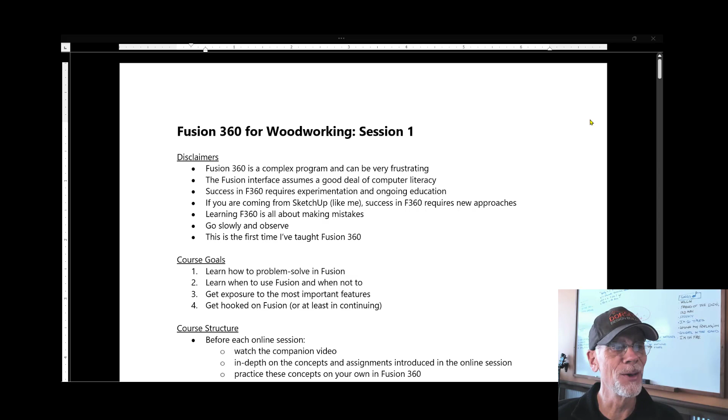So anyway, my goals in the class are for you to learn how to problem solve in Fusion, for you to know after this class when to use Fusion versus some other programs that you may have used for design such as SketchUp. I want to expose you to all of the most important features in Fusion and hopefully get you hooked on it like me.

So the structure of the course: before each session, I'd like you to watch the video. For instance, this is the video for session one. After our online session, I'd like you to watch the video. Hopefully you'll learn new concepts there and practice those on your own. Each of these videos will have assignments at the end for you to do. Please get those assignments done before the next session, and it'd be great if you could take some notes and discuss with the rest of the class your successes and failures as you did your assignment.

At the beginning of next class, each student will be able to present their assignments and share that information with others. Then in subsequent classes, I will demonstrate the new topics, but please interrupt me if you have any questions at any time. Also, if you do miss a class, these videos will go into probably more depth than the class does, so you should be okay.

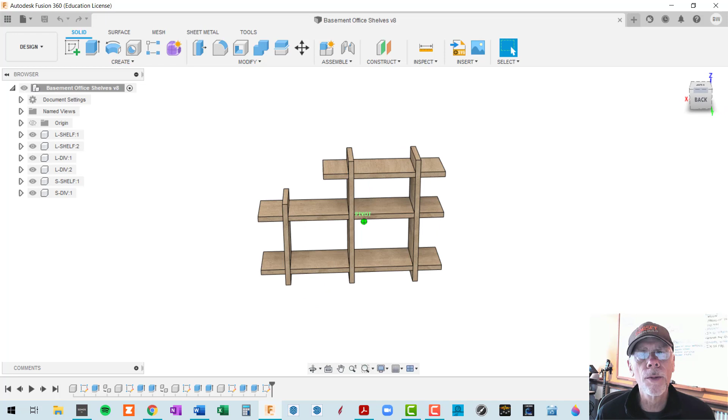There's also this view cube in the upper right corner, and with my left mouse button I can drag that and kind of orbit around, repositioning the view cube. But you can see it's a little difficult to do that, and there's really no reason to since it's easier to orbit using the mouse and the shift key.

But the thing I do use the view cube for is if I want a straight on view, an elevation - I can click on front. If I want a top elevation, I'll use this little button right here. You can spin this around to your heart's content, going from straight on view to straight on view. If you want to return to your perspective view, you can click on the home button in the upper left corner of the view cube.

One of the things I'd suggest doing is using a camera setting of perspective with ortho faces. What that means is if you're looking straight on, you'll get an orthographic view, but if you're looking at a perspective like we are now, you'll get some perspective. Let me turn perspective on and go to my front view - you can see I'm getting some perspective here, and I don't generally want that when I'm in one of these straight on views.

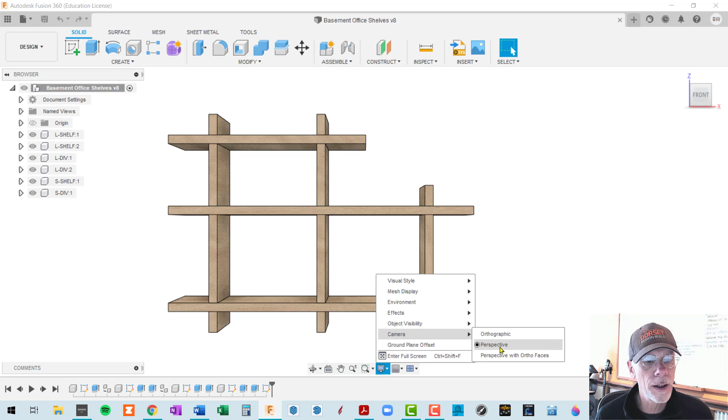So that's why I set this to a camera setting of perspective with ortho faces. Now I'm getting orthographic. If I orbit a little bit, now I'm getting a perspective view. That's a great feature - it doesn't exist in SketchUp, but I would highly recommend you do that.

So that is the data panel. We've done some navigation and looked at the workspaces briefly. Now let's look at the document tabs up here - basically I've got one document open. If I go to my data panel, go back to Woodworking, let me pick another - I'll go to Workbench, and I'm going to open up this Roubo bench.

Takes a second. By the way, all of these files are located in the cloud, so if you've got a complex design, sometimes it'll take a little bit to download. I'm going to close this.

This is a workbench that I built recently from a plan, and I took the plan and inputted stuff into Fusion just to get a better idea of how some of these parts work and interact. Now you can see I've got two documents open. I can click over here to go to this one, click over here to go to that one. And if I want to create a new document, I can either click on this plus here, or I can go to my file menu and do a new design there. So lots of different ways to do the same thing in this program, but I'll try to use what I think is the most common and easiest method.

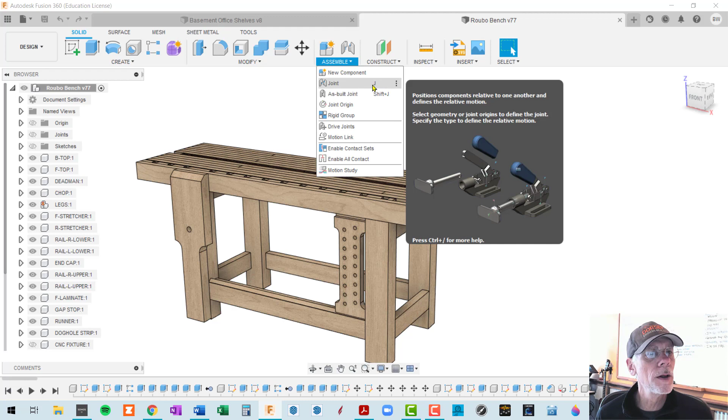So create is basically when you are creating either 3D geometry, or when you're in a sketch, different parts of the sketch. Modify is when you're combining things or cutting joinery or working on existing bodies. Assemble, we will get into this a little bit, but you can actually put things together and have hinges that move, and you'll find all of that in assemble. Construct are basically construction planes that allow you, when you do your sketching, which we'll get into shortly, to sketch on a plane. The origin is accessible on your model, so you can always sketch on that. But sometimes there's an odd angle you want to sketch on. First you'd create some type of plane to do that, and then sketch on top of that plane. So that's what this construction menu is all about.

Inspect allows you to measure primarily, but there's some other things. For instance, you can show different components in different colors. That's something I use often. Insert allows you to insert an existing drawing and kind of trace over it, amongst other things. We'll get into depth on all of the important features there, but just wanted to show you that basically you've got these icons on your screen. You've also got pull-down menus that are complete for all of the creation features, and you have shortcut keys. So again, many ways to do the same thing.

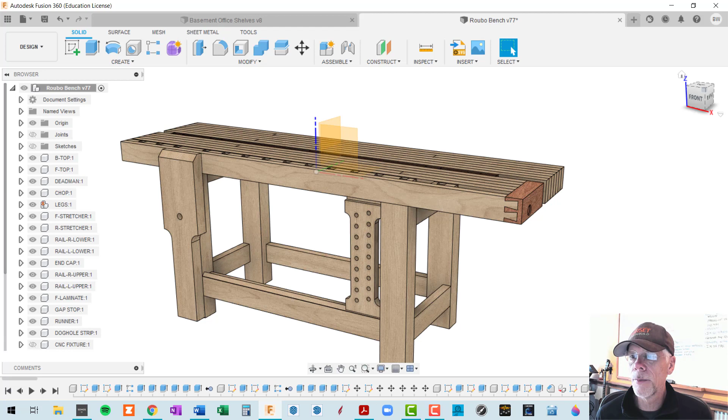Okay, so I'm going to get into a couple other preferences here that will be handy for us. Let me go back to our office shelves. You will see in any file you have, the very first thing is document settings. You'll see that in this workbench as well. So if we open up document settings in this, what's called a browser, it's basically just a tree. If I open that up, you'll see there's units, and if I double click on that... I think that's ending up off my screen. Oh, there it is. Okay. So you have to double click on this little guy right here to change your units.

Now a dialog box pops up that's docked to the right hand portion of the screen, and it's allowing me to select millimeters, meters, centimeters, foot, inches. I think when you start up Fusion, you will default to millimeters. So if you want to go ahead and change that to inch, I think we'll primarily be working in inches. The second thing that you should do is to go to your preferences.

So I clicked on my little BW circle here. When I go to preferences, and down to unit and value display, you'll see that in foot and inch display format, I've got fractional. So instead of inch and a half showing up as 1.5, it's going to show up as 1 1/2, which is primarily what you want for woodworking, at least I do. So anyway, beware of that.

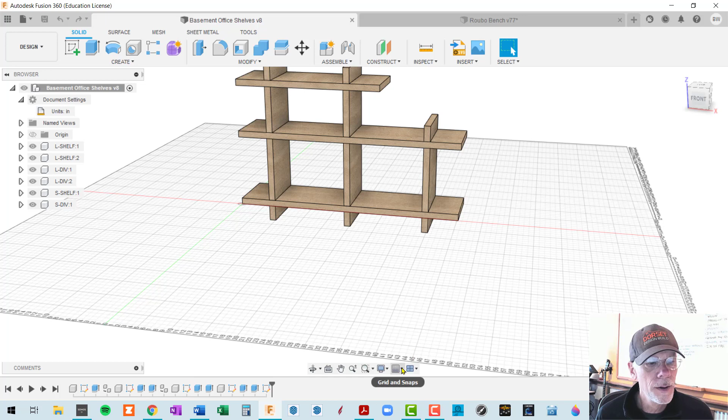Let's see, are there any other preferences? Okay, I do turn off my grid layout. If I turn that on, you'll see you have a grid. But the grid will also come on when you're doing sketching, which is, in my mind, the time that you want the grid. I don't really want it here. So if I turn grid layout off, you won't have it when you're just viewing your model.

So let me show you very quickly one other way to navigate. I have on my desktop a little device, I don't know if you can see it in the camera here, hopefully. It's called a 3Dconnexion, and it's just like a knob, but it's specifically made for CAD, so that I can hold this knob with my left hand and pull it in and out and turn it, and basically maneuver this knob any way I like, and it's super intuitive where I can quickly and easily navigate this model.

Certainly not something you have to have, but if you end up doing a lot of CAD modeling, the nice thing here is I can keep my right hand on the mouse and not have to use that for navigation. I can use that only for selecting menu items, and then use my left hand for very quick and smooth navigation. So it's out there if you want to take a look at it. But certainly not necessary.

All right, so moving on to feature dialogues. What I mean by that is I will do a quick extrusion here. So I'm going to click on a surface, and then go up to Create and select Extrude. Now I have a dialog box up on the screen that says Extrude, and it has lots of settings in it. That's what I mean by a feature dialog. So any feature that you do, whether it's an extrusion or a loft or a sweep or whatever, will have its own feature dialog box.

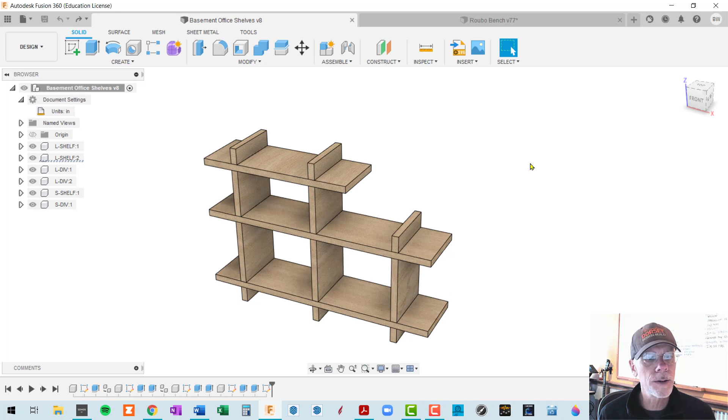Once these are up, you pretty much either have to cancel out of it or select all these settings and do an OK. For instance, I can pull this up, and you'll see the distance here is being set, and I've got an operation that's join or cut or intersect. I'll get into that in depth, but if I click OK, then the feature dialog box is gone. Then I can do other things. So I'm going to hit Control Z to undo that.

Okay, now to go back there and do that again, this time I'm going to hit the E key, which is my extrude shortcut. I just want to show you that you can move this feature dialog box around, and it does have a tendency to get in the way of what you're doing, but you can always pan your model away from it. I like to leave it here on the right hand corner of the screen, and if you want it back here in this area, all you do is drag this. I see how I'm getting a green bar highlight, and then let go of it. That docks it on this right hand side of the screen.

I'm not sure if you can dock in other spots. Let me see if I can. Here I can dock it left, but just see it moved the browser over. So I'm going to go back over here. Okay, so these are what they call feature dialogues. I'm going to cancel out of that.

Now, one of the things that I think takes some getting used to, coming from SketchUp for instance, is that you do an extrude and you think you're done. And then you try to go off here and do something else. Well, in that case, that finished my extrusion.

I was about to say you won't be able to do it. Sometimes when a feature dialog box is up, you can't do something else. You have to finish that feature first, so just be aware of that.

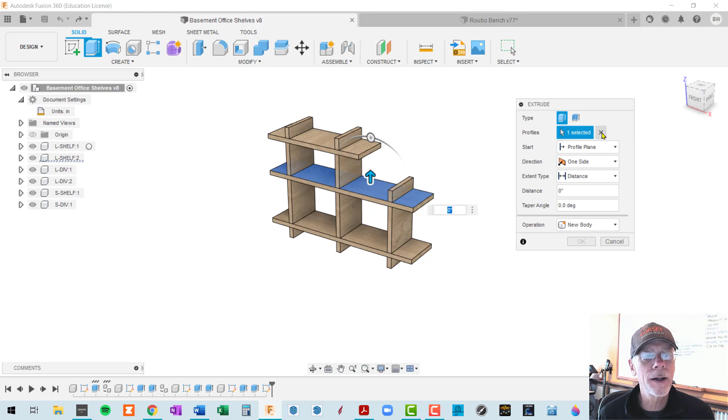Okay, that's feature dialogs. One other thing in feature dialogs is, I'll do an extrude. This blue setting, beware of that, because that is basically telling you what you should do, though you can set any of these in any order you want. So for instance, I can kill my selection, and it's saying, well, you better select something to extrude. So I can go down and select that.

And then once I'm done with that, I can handle the other settings. So the blue area is generally just a suggestion by Fusion that this is either the next thing you should do or the most important thing you should do within this feature. So let me dock my feature. Let me cancel to get out of there.

Okay, so let's see what we haven't gone over here: navigation, preferences. I feel like I'm missing the browser. The browser is basically a tree structure, and you can open things up by clicking on this little triangle. You can see that sometimes there are multiple levels of features and other items to open up here. A lot of this gets set up automatically by Fusion, and some of it's stuff that you set up.

So this is your file at the very top. Then you have your document settings, which we changed to inches. I'm going to close that up. And then you have named views, which are exactly the same as this in the view cube. So if I click on front, it's going to scroll to the front. Named views allows you to basically set up your own view. So if for whatever reason I want to be in this particular view, I can go over here to named views.

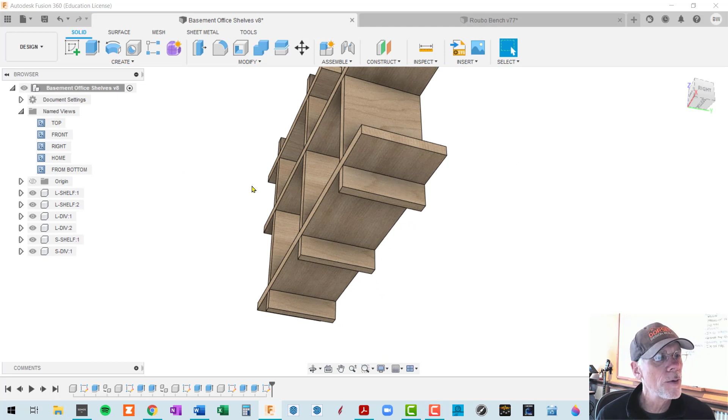I will show you renaming in another area that I think works a little bit more predictably. So I'm going to close up my named views. Then I have my origin. This is the origin for the entire model, and we'll get into strategies on where you want to start your sketches relative to this origin, which can really help you. But that can always be viewed or it can be hidden. So if I just click on the little eyeball, I'm hiding my origin.

Okay, so then I've got a series of what are called components. And if I click here in the browser, you'll see also over here in the model space, I get a blue highlight. So that's L shelf 1. This is, I think L for large, so this is large shelf 1, this is large shelf 2. And you'll see a little bit of difference here: you'll see shelf colon 1, shelf colon 2. That means these are identical components, and this is the second instance, and this is the first instance. But we'll get into that also.

Now here's my divider, my large divider, my second instance of the large divider. Again, these are all components. And now I've got the small shelf and my small divider. Okay, so these are all components. If I am to open up any of those, well first off, let me close it. I can hide any one of those.

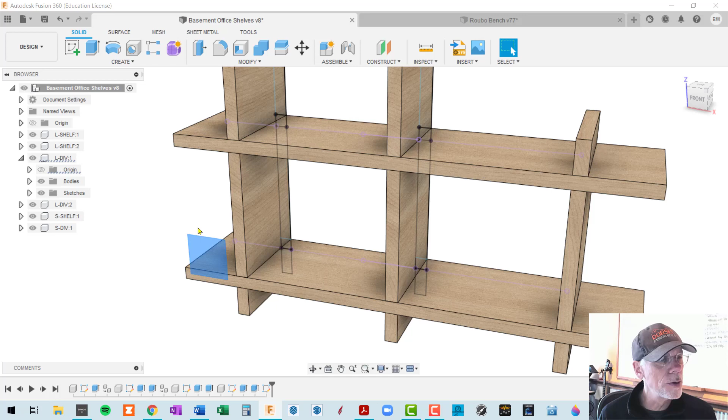So let's see, we want to find something in the browser. I want to find this origin. So I click on it, and now I see a little squiggle underline. That shows me it's in this large divider. So if I open up the large divider and go to my origin and hide it, boom, it's hidden. Now you still see a blue selection. If I click outside that blue selection, that's gone. That's just telling you it's still selected, but it's hidden. So you just click away from it and it'll be gone.

Now the same thing here. I've got a sketch and I don't want that showing. It's really not part of my 3D model. So if I click on this and then right click and find in browser, where is that? So it's also in my large divider component, and now sketches opens up and it shows this sketch. So I'm just going to hide all the sketches in that component, and now I'm good.

Okay, so if I go down here and say, okay, I only want the large shelf, which is this one right here. I only want that. I only want to work on that. I'm sorry, the large shelf is this horizontal piece. You see how that is highlighted, but everything else is dimmed. So that means, okay, you have this component open, and if you create sketches or create additional bodies, they're going to go inside that component, which is essential for keeping your design basically in order.

So you really, in the browser, should always be conscious: am I in the entire model, which I am here, or am I in a particular component? And when you're in a particular component, you will see that. Now, if the rest of that stuff, if you don't want to see the rest of the components within this model...

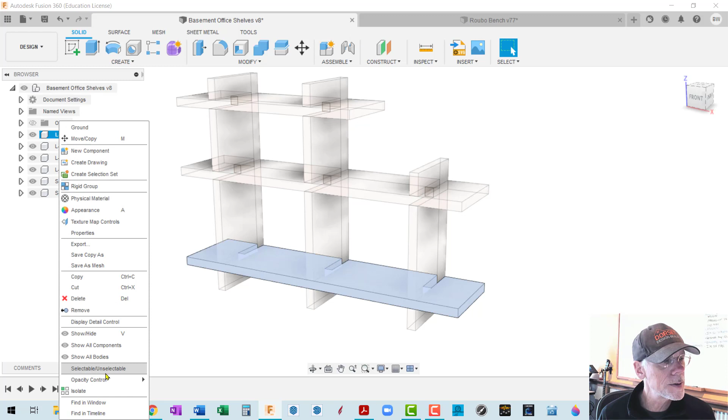Another thing you can do is I can right click on this and go to isolate. And now the shelf, the large shelf, is the only thing that shows up on the screen because I've isolated it.

If I want to unisolate it, I can right click and go to unisolate. Another way of doing that, if I undo one level here, is to go up to the office shelves, the entire file basically, and I can right click and say unisolate all. And now I've still got this shelf as the active component, but all the rest of the components are also shown. If I want to see everything, the way we saw it initially when we opened up the file, I can just activate that top level component, basically the file name, and now I see all the parts.

So that is the browser. We will get into a lot more of that as we use it. It's essential, you use it all the time.

This thing down here is very interesting. This is the timeline. So basically, based on which component is active, and I've got our top level component active, I see a timeline of all of the operations involved in creating this model. And I can take this, I can either use these little fast forward, rewind buttons, or I can actually scrub this by pulling this back.

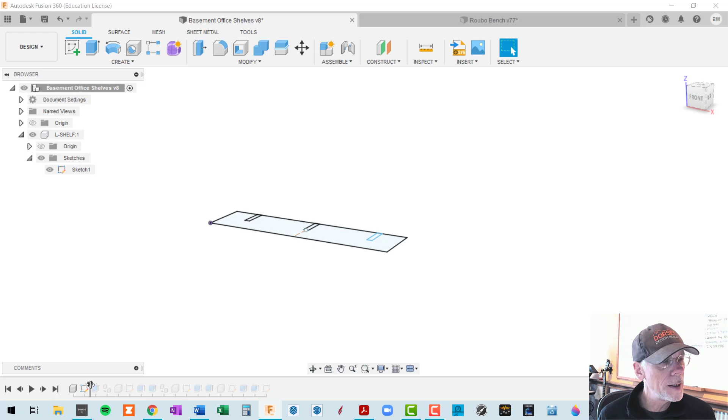Then the next step is I did an extrude, and the next step I actually copied this to make a second instance. So now we have two shelves.

If I go forward again, I'm creating a new component. There's nothing in it right now. Then I create a sketch. Again, that sketch is hidden. So if I go to this divider, I can turn that sketch on.

And then I'll go forward again here. I did the extrusion for that, and a second extrusion which fixed a little problem that I left behind.

Anyway, go forward here. Created another copy of that. Now here's a new component. I'm now doing a sketch that is, again, hidden. Let's see if we can go up here and show all sketches.

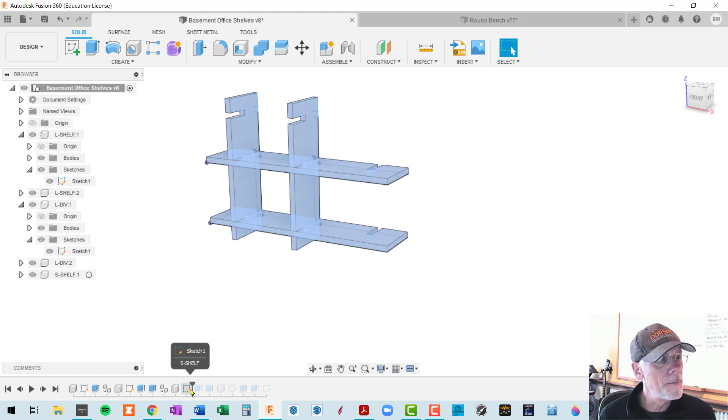Is that a feature? Nope, appears like it's not. Anyway, let's say I want to find this sketch. It's like, where the hell is this sketch? It's somewhere in this browser. And the easiest way to do that is I can right click and say find in browser.

Now it opens up the small shelf and it opened up sketches, and now I can show all the sketches, and there it is. So I'm not going to go through this whole thing, but you can see if I take this to the end, it's showing you basically all of the design history.

Let's see if I right click here. Can I hide all sketches? No, that would be a good feature to have.

So basically now that I have these sketches showing, I'd have to open up the component. The easiest way to deal with this is to click on it. You will see, okay, there it is. It's blue highlighted. I'm just going to hide all my sketches for that and then collapse that component.

This component has sketches it's showing. If I click on that sketch geometry, I'm seeing that this large shelf is highlighted. I open that up, I hide those sketches. Now you see there's two sets of sketches hid because these two components are identical.

So if I do something in one of them, you'll see that, like I turned the origin on, it not only turned on in the second instance, but it also turned on in the first instance. So I'm going to hide origins in one of them. They both hide. Okay, so that is the timeline and browser.

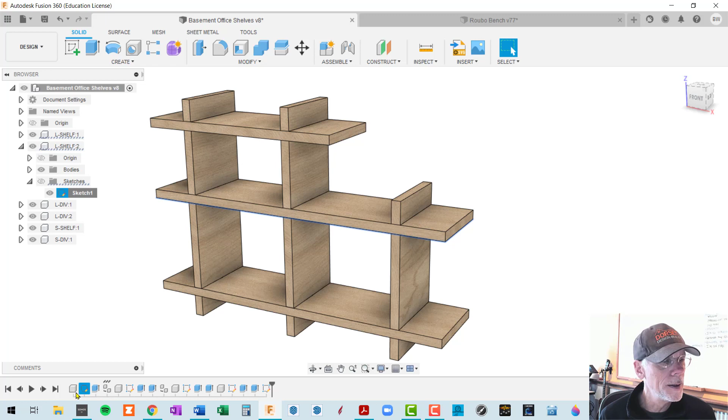So we will get into editing the timeline because that's the purpose of this. This is essentially parametric design, and I can go back in any of these things without undoing everything and make changes to a sketch that I did a long time ago, and then everything replays and the model will update itself. So it's really very cool once you get used to that.

All right, so that's kind of an intro to the timeline, intro to the browser. And the next thing we will do is to get into sketches. Let's get into sketches now, which are very important in Fusion 360.

Basically, sketches allow you to draw on any 2D surface or plane, and you can draw a series of arcs, lines, points, splines, any kind of 2D geometry. And then you generally use that 2D geometry to make a solid body, either extruding it or doing lofts between a couple of sketches, that type of thing.

So let's see what happens when we first create a sketch. I'm in a new document here. If I simply click on Create Sketch, I'm presented with the origin and 3 planes that I can select. And as I hover over these 3 planes, you can see the grid becomes parallel with that plane. So anyway, let me pick one of those.

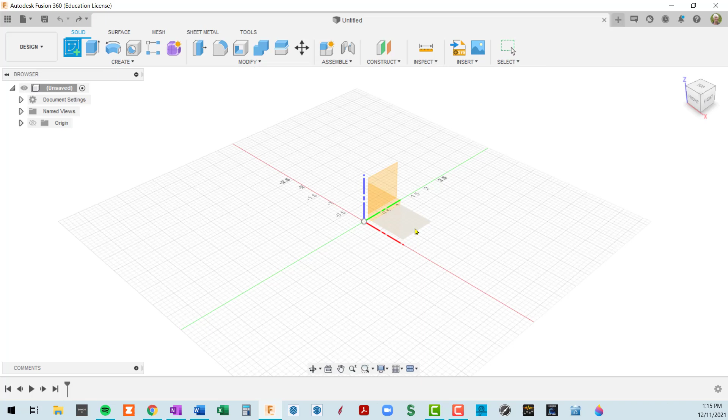I'm presented with 3 planes to select. I'm going to select this ground plane. And now the view cube says top - it's looking straight down at it.

I know I'm in sketch mode for several reasons. One, there's a new button here that says Finish Sketch. Second, there's a sketch palette dialog box that popped up. And third, this sketch tab, which normally doesn't exist, is highlighted. There's also a new set of create and modify tools and new menus.

So there's nothing in here to create 3D bodies. This is all now commands to create 2D geometry. I'm going to pick a 3-point rectangle, which allows me to start at one point, move to a second, and move to a third to define the geometry I want.

Okay, so now I've created a sketch, and if that's all I want to do inside it, I can click on this green check mark. Over in the sketches folder, I can hide or show that sketch. I can also double click right here to edit that sketch - now I'm back in it and can make any changes I want.

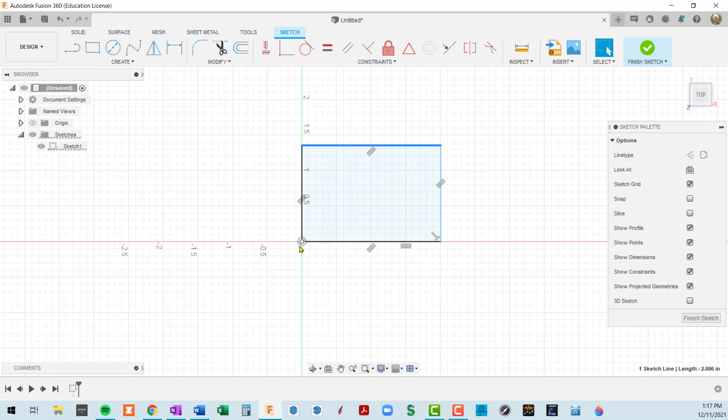If I want to drag this rectangle in a little bit, I can do so. One thing you might notice is I've got a couple of black lines and a couple of blue lines. The black lines are what Fusion considers fully defined, and they coach you to always have fully defined sketches.

Basically that means every piece of geometry in your sketch is either dimensioned - here I'm putting 4 inches in - or constrained with these little constraints, as they call them. For instance, here's one right here. If I hover over it, click on it, and look at the bottom right corner of the screen, we'll see that's a parallel constraint. If I click on this one, it says it's a perpendicular constraint. These little icons pop up showing what constraints were automatically added to the geometry as I was drawing.

But another thing you can do - let's just start drawing some lines. If I draw a line here and hit the check mark, I get out of the line tool, and if I hit escape, I'm in my selection mode. So I can take this point and move it anywhere, take this other point and move it around, and take the line and move it around. The reason I can do that is the sketch is not constrained.

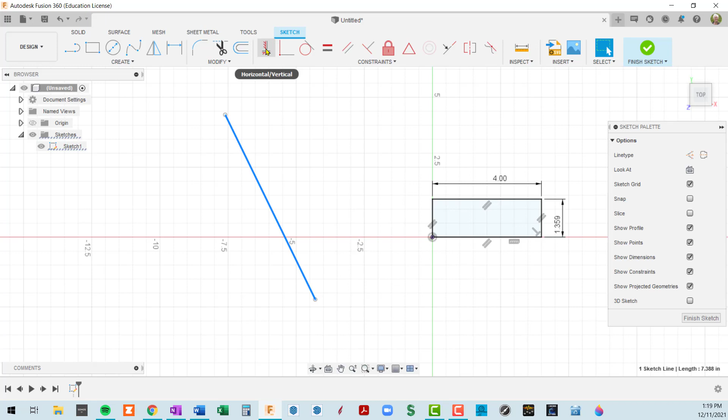So I can start putting constraints on here. Let's say I want this line to be vertical. With it selected, I click on the horizontal/vertical constraint, and now a little icon pops up showing it's always going to be vertical. If I hit escape to go back to my selection, now when I move these points or drag this line, I can still move it, but I can't change the fact that it's vertical.

So it's constrained to stay vertical. Now if I also do something like a coincident - I've got this point selected, I click on coincident and click on the origin - now the line moves to the origin. So there are two constraints on this line: it always has to intersect the origin, shown by these coincident icons, and it always has to be vertical. I can change the height, and I can flip the direction it's going in, but I can't change the angle or move it around, because it's always vertical and the top point is always at the origin because of that constraint. That's what constraints are all about.

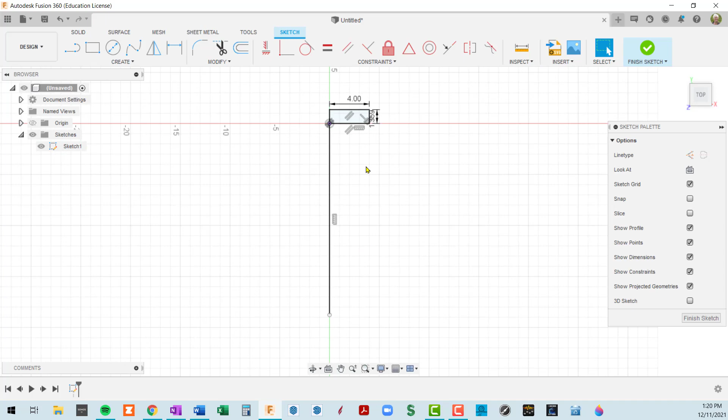You don't have to use them, but it is handy to use them. It prevents mistakes, and it also aids in parametric modeling, which we'll get into more detail in the next class.

Okay, so let me do another type of rectangle. This one is a centered rectangle, and if I click on the origin, now as I move out, you can see I've got a dimension on the top which says 41.5 some odd inches, and it's highlighted.

So I can type in 40 and hit the tab key, and now it goes to the second dimension, and I'll say 20 and press enter, and I have a 20 by 40 rectangle, and it's also centered in the middle of the screen. So now this entire rectangle went black because it means it's fully constrained. If I grab any portion of this rectangle, any of the points or edges, I can't move it.

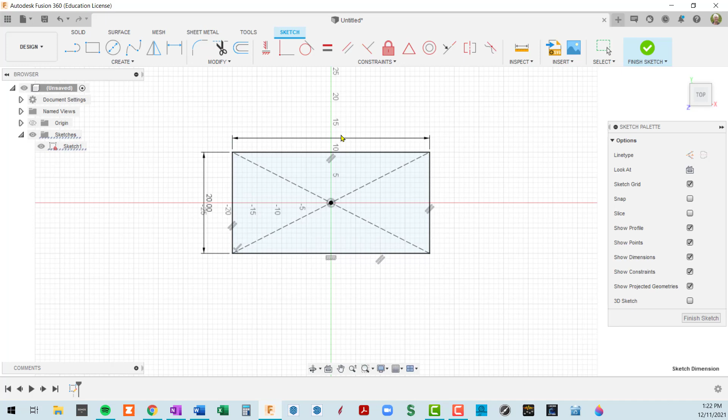These dotted lines are called construction lines, and basically the way this stays centered is Fusion automatically drew these two construction lines and set a coincident constraint to the center of the origin. So these dimensions we typed in mean this box is going to stay 40 inches by 20 inches, but we can double click on that dimension and change it to anything we like at any time.

So we can finish this sketch. Now we're back in our original view. I'm going to do an extrude, which allows me to stretch this up like a push-pull in SketchUp, and click OK. And if I ever want to change this box, you can start extruding these different sides, but you really don't want to do that.

You want to go back to your timeline and right-click on the sketch, edit the sketch, and change the dimension. I'll change this to 40. Well, let me change it to 50. And then we should have a cube when I get out of here, although I haven't changed the height. I'm sorry, we have a square, kind of like a 2x piece of wood.

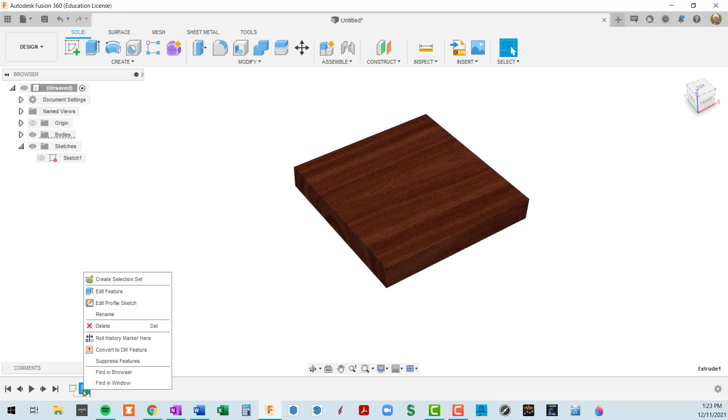We'll see that we can also change these features. I can edit a feature and go in, and let's say I want that to be 50 inches as well. That's changing the height of my extrusion.

So at any time during the modeling process, I can go back to a particular sketch, right click on it in the timeline. Or I can double click here, same thing. That will get me into the sketch. Or I can double click there or right click and edit sketch.

One of the things you will see is that your sketches often will become hidden after you create your 3D body, and that's controlled over here. Fusion does that as a convenience to you, to go ahead and hide your sketch automatically, thinking that you're done making your solid body, so you no longer want to see your sketch. Sometimes that's what you want, sometimes it's not. So just be aware that you can come over here and manually turn your sketch on, very similar to the way we can turn bodies on and off.

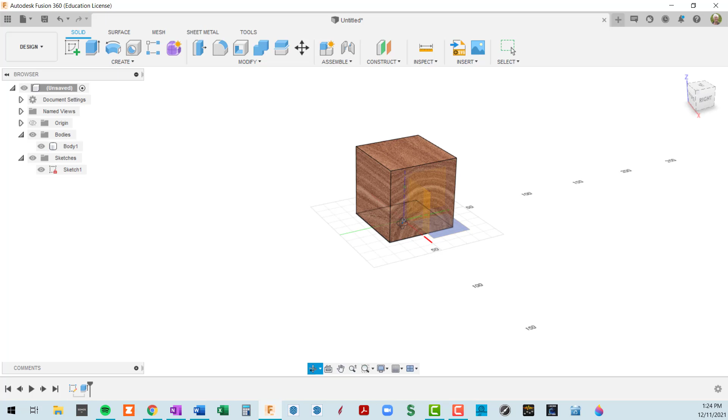If I turn this body off, now we can see the sketch that was partially hidden on the bottom of this body. So we're not limited, when creating a sketch, to just those three surfaces. If I want to create another sketch now, I'll click on this Create Sketch button. I can now select any of the surfaces in my model, in a 3D body. Let's say I click on this bottom right here.

So watch what's going to happen. Watch the view cube and see how that's going to orient, and watch the rest of the model. So when I click here, Fusion automatically orbited the model, and we're looking at the bottom because that's where I said I wanted the sketch to appear.

Now you don't have to do your sketches looking straight at it. For instance, I'm going to do an arc, a 3-point arc. I'll start somewhere here and go here and create my arc. And you see that arc appeared on the bottom of this body because this is the sketch plane that we're sketching on.

If I ever get off axis where we're not straight on looking at it, I can come over to the sketch palette and click on Look At, and that will give me that bottom view. I could also manually orbit there, or better yet, use my view cube to get there. So you are drawing 2D geometry, but you're drawing it somewhere in 3D space, and that 3D space is defined by the plane that you clicked on.

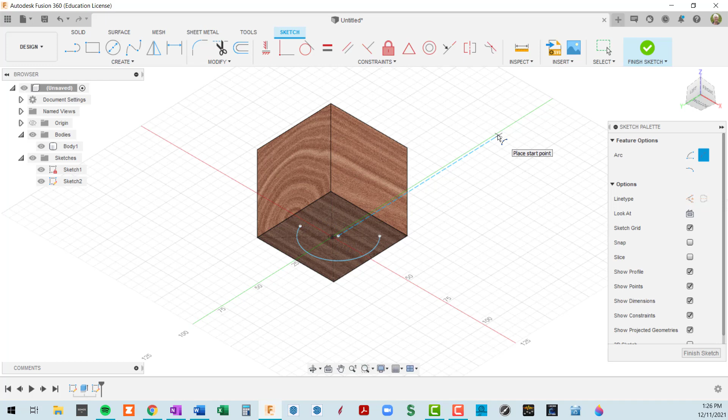Now I don't have to draw directly on this object. If I drew out here somewhere and did another circle, you will see, if we can orient this properly, that this circle is on the same plane as the first circle I drew. So I'll hide the body so you can see that better. Anything I draw while I'm in this sketch is always going to be on the same plane as the plane that we selected when getting into the sketch.

And again, you know you're in a sketch in this case because I've got a grid, I've got a Finish Sketch button, I've got a sketch palette, I've got this sketch tab up here, and I've got particular tools that are particular to making 2D geometry in the sketch. Okay, so that's a basic intro to sketching.

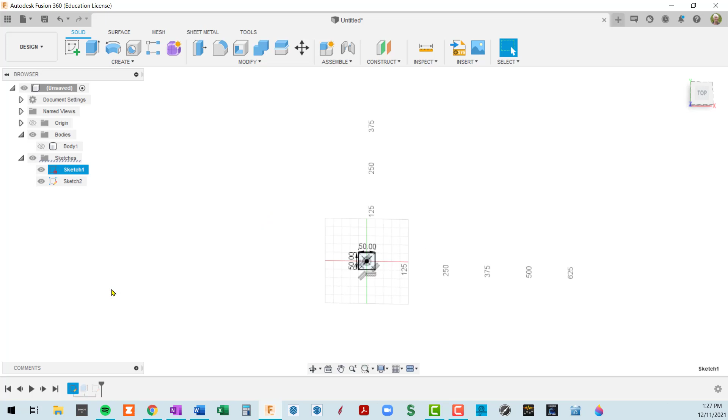Now let's see - dimensioning and constraining we went over briefly. Let's say we want to go back into this sketch. We've got two sketches now, and in this timeline, let's go back to the first sketch. If I right click and edit this first sketch, watch what happens - the circles are gone. Now, when that first happened to me, I thought something's wrong, or I did something wrong.

Why are my circles gone? Well, what you have to realize is you've gone back in time. You are editing the sketch, and you're going back to the point where the sketch was defined in the timeline. So those circles do not exist yet in the model. But let's say we wanted to reference those circles because we want to draw lines from those circles to this rectangle.

There is a solution for that. I'm going to finish my sketch, and now I'm going to take this sketch and drag it on the timeline. See if I can do that. Well, let me try an alternative - I'm going to drag the second sketch, which is the one with the circles, and drag that to the left, and that's as far as I can go. But sometimes you're able to drag a sketch and put it in the spot you want.

So now if I edit the second sketch by doing an edit sketch, you can see I've got my rectangle to reference. So it's kind of a poor example, but what I'm trying to say here is you can go back and edit these sketches, but when you do, you are rewound in time. So you may not see some bodies and other sketches that you thought you should be seeing.

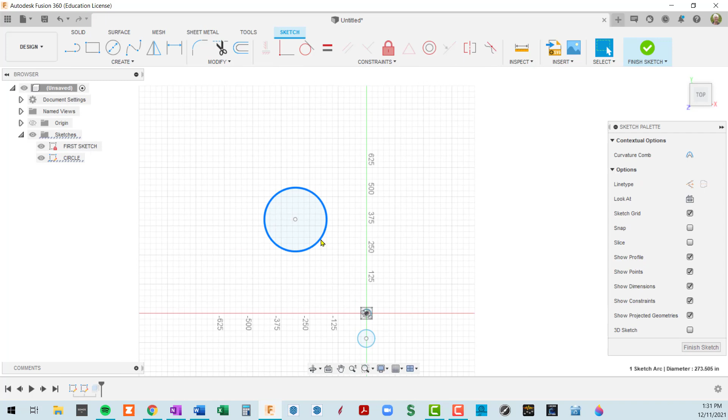Okay, so one of the things - we know that we have timelines down here, but a sketch itself does not have a timeline. So when I right click on this and edit this sketch, I don't have the ability to play a timeline back and forth if I had multiple things here. If you want to change something, you may have to delete a portion of your sketch and add new things into your sketch. That's all well and good, but there is no timeline itself inside a sketch. So that's important to know.

And beware of this - when you do sketch geometry, and this threw me for a while, I could go in here, let me do another rectangle. So one way of repeating the last command you did is right click - and it's not there, sorry, let me create - oh, I'm not in a sketch, okay, that's why. So I'm going to click on this, this is the sketch I want. So I'm going to show you another way to edit it - I'll just simply double click on that little sketch icon in the browser.

So now if I right click, I still don't have that rectangle. I'm going to go up to create and pick 2-point rectangle, and draw a rectangle right over the top of this existing rectangle.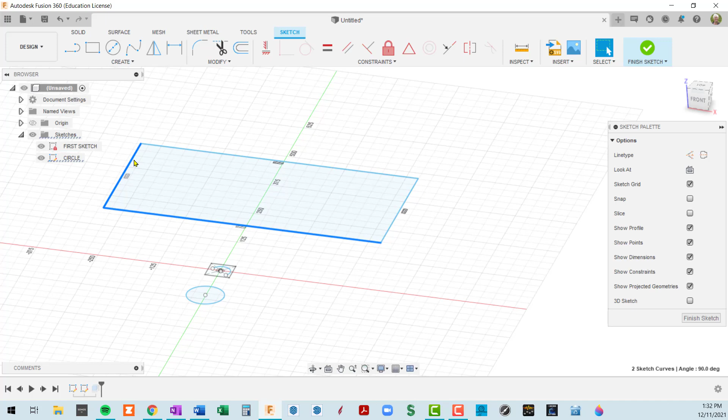Now, what I want to say here is that if you do that, there's actually 2 sets of those rectangles there. This is not something I realized at first. So I'm going to press Escape because I'm currently in the rectangle tool, now I'm back in selection. If I double click on that rectangle and press delete, you see there's still geometry there. If I double click on that and delete, then it's actually gone. So if you're drawing on top of other geometry, beware that the first set of geometry is not combined with the second set. It remains unique.

All right, let's talk about unwanted sketches, and let's talk about pre-selecting. So I'm going to extrude this. I'm going to hit E for extrude, and extrude this circle up and make a cylinder body. Here's my body here. I'm going to turn on the other body we have, so we have a couple of bodies in here.

Basically what I want to do is, let's say I wanted to create a sketch here. But for some reason, I have selected the top of this rectangle doing some other work, but I intend to draw my sketch up here. So I go up to create sketch, and guess what? My sketch is automatically right here.

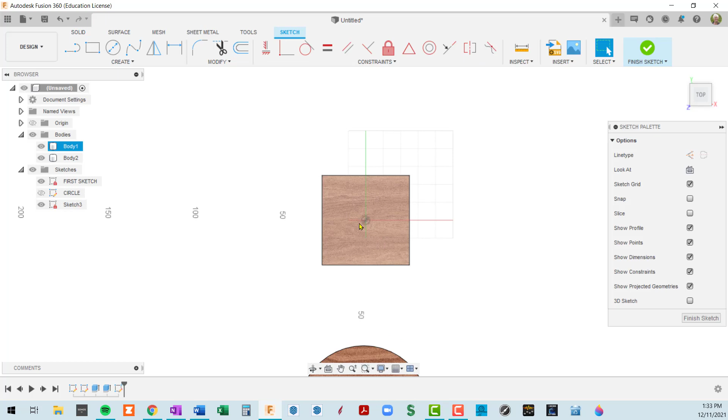I'm going to redo that and show you a little better example. Let's say I selected the side of this cube, and I'm doing some work on the side of the cube. And then I realize, oh, I want to create a sketch on the top of this cylinder. So I go to create sketch, and now it's down to the side here, because I had something pre-selected when I hit the create sketch button. So that throws me a lot. I suggest that you beware if you've got something selected before you want to create a sketch.

Generally, I would just click outside of all geometry. That's a safe way of unselecting anything you might have selected. Then create a sketch, then select your surface. Then you're going to be oriented to that surface. Again, if I orbit, holding down my shift key and holding down my middle mouse button, I can orbit away. If I ever want to look at that straight on at that sketch plane, I can come over here and do a look at, and Fusion is going to orbit to show you a straight on view of your sketch plane.

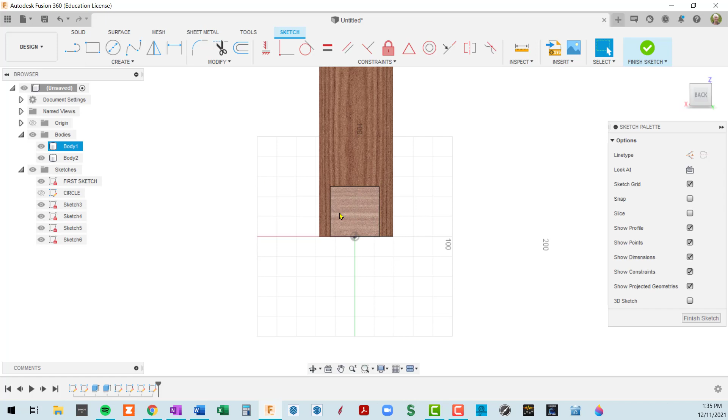Okay, so let's say you got in that situation where you have something selected, and this will happen to you, and you want to create a sketch here, and now you know, I'm not in the right plane. I can't start sketching here because the 2D drawing is going to be in this plane, not up in the plane where I wanted it. So if you hit escape, for some reason, you don't get out of the sketch. You would think that escape would take you out. And you can finish the sketch, that's one way. But you've actually created an empty sketch here.

In fact, I've created a bunch of empty sketches, which is not a good idea because you'll come back in the future and say, well, what's in this sketch? What's this all about? And you double click and nothing happens and you don't know what's in there.

So a better way of doing that is if you are pre-selected somewhere, you create a sketch, you want to create a sketch on the top of the cylinder, and you are now in an unwanted plane. What I do, and you see there's a new sketch created here, sketch 7, what I do to get out of that is Control Z back to the point where that new sketch is gone in my browser. It may have taken me a little while to realize that.

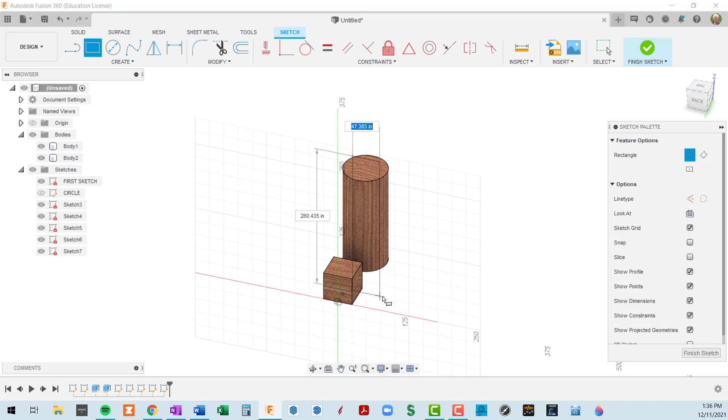Let's improperly select this plane again because we want to draw here. So if I get in my sketch and for some reason I think I'm drawing over here, and I get a rectangle tool by pressing R and I start drawing here, and for some reason now it's drawing vertical. It's like, whoa, wait a minute, what's happening here? And then I realize, oh, I'm on the wrong plane.

Okay, so now if I do Control Z, another Control Z, a third Control Z, then I undid the sketch geometry and got out of the sketch. So sometimes it takes multiple undos to get out of that situation.

Okay, so let's get into a little bit more detail on the browser over here. I've opened up a cabinet that I modeled and built recently. This is based on an article that was in Fine Woodworking. Very cool cabinets if you haven't seen that. Shop grade cabinets with pretty modular system. So I built a very small version of that, and that's what we have on the screen right now.

So getting into more specifics of the browser. First of all, this browser window width can be manipulated up here. So if you get into a situation where you've opened up the browser and some of your text is truncated, you can just drag this window to the right to see more detail here. But this is basically a tree structure.

And what we've got here is a series of components within this model. If I just click on each one of these, you'll see it's getting kind of blue highlighted. And any of these, I can click here on this triangle to the left and open it up. And within there, you're going to have a series of folders. You'll always have an origin for a component. Usually you'll have bodies for a component, and most likely sketches as well.

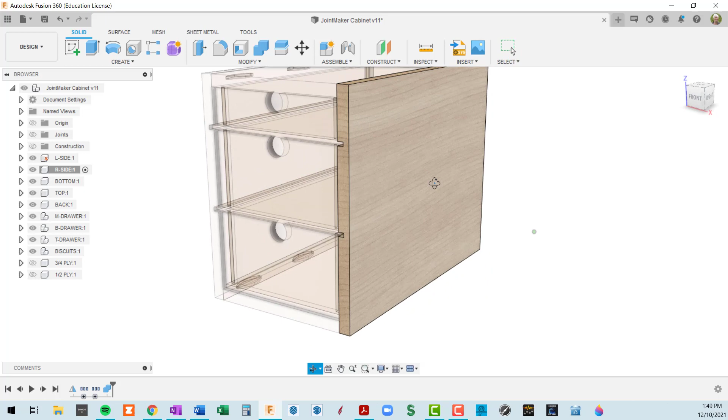Okay, so let's talk about finding items in the browser. I'm going to go back and activate my top level component, so I can see all of my bodies, all of my 3D bodies within the model.

Now let's say I want to find this bottom piece. I can either rely on my naming of these components, which I'll get into in a second, or I can just click here. And when I do, you'll see that there's a kind of squiggled underline underneath the component that I have highlighted here. That means that is the bottom component. If I do that on the right side, you'll see that the right side is highlighted. If I do that on a drawer front, you'll see that the middle drawer is highlighted. So that's how you find things that are in the model.

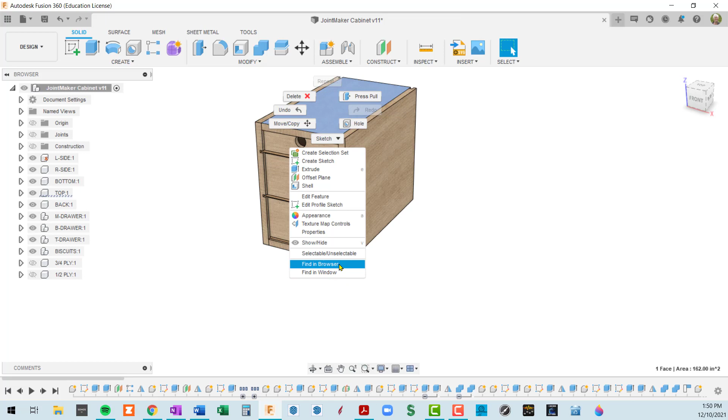There's also, I can right click on it and say find in browser. And now that does a little bit more. That has opened up this top component, opened up the bodies folder within the top component, and has done a squiggle line underneath the particular body that I clicked on. So if I click on this piece of masonite right here, which is the bottom of the top drawer, I right click on that and I say find in browser.

Now let's see what happened. I'm not seeing that, let me try that again. I'm going to right click and find in browser. Okay, I guess I didn't click on it. So my top drawer folder, my top drawer component opened up, and within there I've actually got components.

So this is an instance where I may want to hide this drawer altogether, which I'm doing right now. But that drawer is also composed of a series of components, and if I turn those on and off you can see there's the bottom, there's the front. I can individually turn those on and off. So now things are getting a little complex here.

Let's say I just want to look at the top drawer and then see the individual components within it. I can right click on this top drawer component and go down to isolate. Now what isolate did was simply hide everything else besides this top level component, and so now that's all we see.

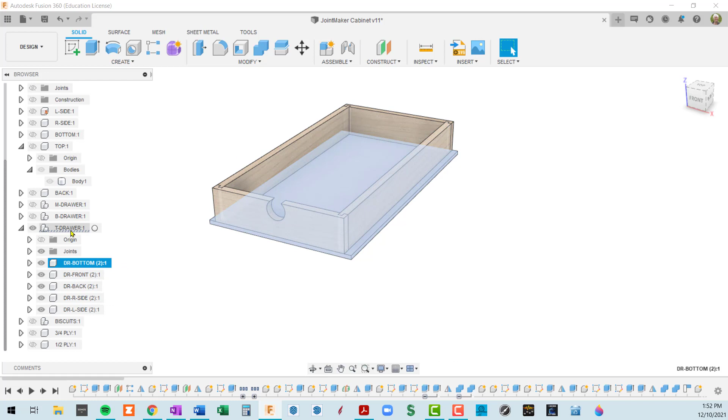As I go down here, if I click on things in the browser, you can see it's highlighting it in the window. There's my bottom. I'm going to collapse this. So now I'm seeing I've got 1, 2, 3, 4, 5 components within the top drawer component, so I've got a nested component essentially. And you can see as I select each one by clicking on it here, it's highlighting it in the window.

Now what's the difference between me selecting it here and activating it right here? Well, the big difference is when you activate something, when I create new things such as a sketch... so I'm going to open this up so we can see what's happening here. So I have activated the bottom of the top drawer, and I'm going to click on a new sketch.

I'm just going to say let's sketch something on this face, sketch a circle here on that face, and click on Finish Sketch. Okay, now the sketch got automatically hidden, but if I go to my Sketches folder and turn that on, you can see I've got a couple of sketches going here, and this is the one that we just created, so I can hide and show that.

So what I was trying to say about activation is whatever component is activated, that's where your new sketches or new bodies, whatever you're creating, will go into that particular component that is activated. If I was to -- I'm going to actually undo that, and I'll do the same sketch without activating. Okay, so I've undone all of that.

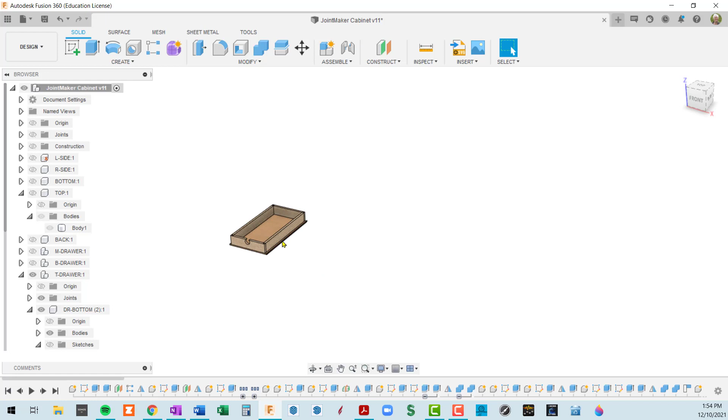I'm going to do the same sketch without activating this component. I will go up to the top level component, activate that, and now we should be able to see everything. Well, remember we had isolated this drawer, so unisolating the drawer, I can go back to this drawer, right click and say unisolate.

Another way I could have done that is to go to the top level component and show all components. So isolating is simply a shortcut to individually hiding all of the other components, no difference really. Okay, so now I've activated the top level component.

And if I was to make a new sketch now, I will select that same surface to sketch on. I will press C for circle, which is the shortcut for circle, and just make a big old circle. Click on Finish Sketch. Now this one is showing.

Now where is this in the browser? Well, if we want to know, we can right click on it and find in browser, and there it's blue highlighted. So it's in a Sketches folder. I'm going to collapse that folder, but it's in this folder right here, directly underneath the main level component. It's not inside any of these other components, and it got there because I had activated this top level.

So we'll get into a methodology that I use, which is basically make everything into a component and make sure that component is activated while you're working on other things within that component, when we do our examples for your assignments. Okay, so let me check my notes to see where we're at here.

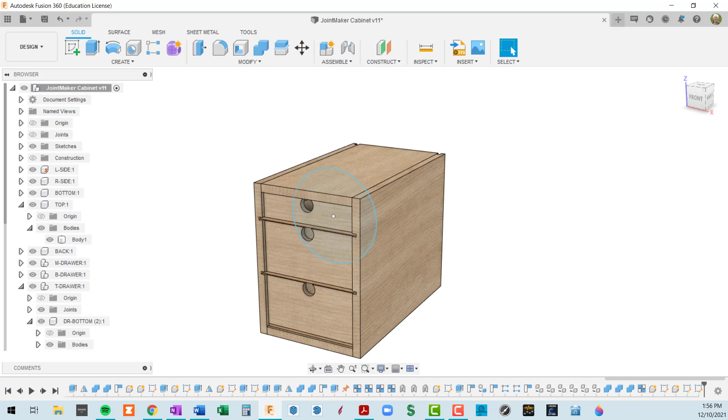So we know how to hide and show different items, we know how to activate, we know the difference between selecting and activating. We've done isolation, we've found items in the browser. Okay, so the last thing to talk about is tidiness of the browser.

If you leave these folders open like this, at least I do, you'll quickly lose track of where you're at. So if I'm done working on something, I will make a point of collapsing it down. And before I collapse it down, I will generally ask, are there any sketches here that I really don't want to see? Sketches really exist for the purpose of creating these 3D bodies, and after you've created it, you don't necessarily have to see the sketch.

Before I collapse something like this folder, I will generally either turn all of the stuff in that folder off, or sometimes turn individual things off. Either way, then collapse. Okay, so that is basically how to manipulate the browser and find things in the browser.

Next, I want to get into bodies versus components. We've seen that when we create a sketch, I'm going to make a rectangle and quickly extrude it by pressing the E key. If I click OK here, I have created a body. That body appears in the bodies folder underneath the top level model. I can hide and show the body. One thing I can't do is actually just move it on the screen by clicking on it.

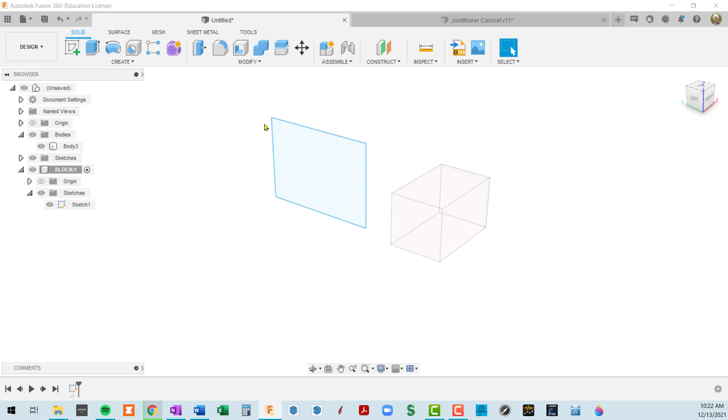So now with this component activated, and this fisheye showing that it is the active component, when I create a sketch, I'll create it on this front plane. I'm going to make another rectangle and finish my sketch. You can see now that within my block component there is a new sketches folder with sketch number 1, and if I hide or show that, I can see that's the sketch I just made. Now if I hit E for extrude and extrude that sketch back and click OK, I'll also see a bodies folder in here and I can turn bodies on and off.

So now I have this concept of a protected element in here that I can turn the whole thing on and off, all of its sketches, all of its bodies, whatever the components are. Another thing I can do is actually move this on the screen. I can take my cursor and just move this around, whereas this body here I'm not able to move.

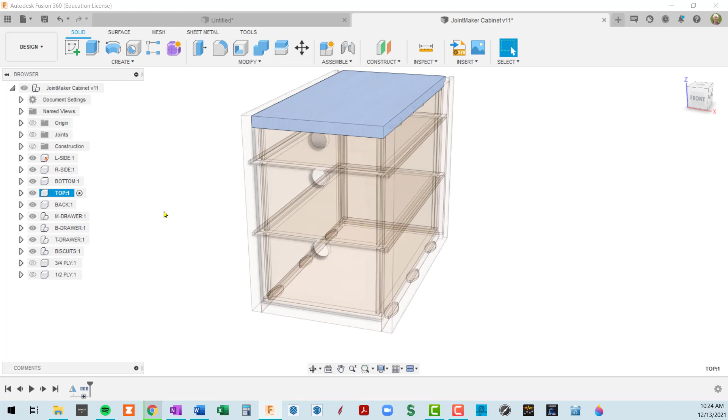But the most important reason, I think, for doing individual pieces of wood in separate components, which is what I would suggest doing, is that it gives you a shorter timeline. Here is a cabinet that I modeled and built recently, and you can see that if we activate the top level component, I've got a very long timeline here. But if I activate, let's say, the top, I've got a relatively short timeline. So this component approach allows you to work on stuff much easier with shorter timelines.

The second thing it allows you to do is nest things. So if I activate this middle drawer, and right click on it and isolate it, now I'm seeing only the middle drawer component, but within that middle drawer I have 5 different components: the bottom, the front, the sides, the back, etc. So the second advantage of putting things in components is that I can nest things, and for instance I can turn this entire drawer on and off.

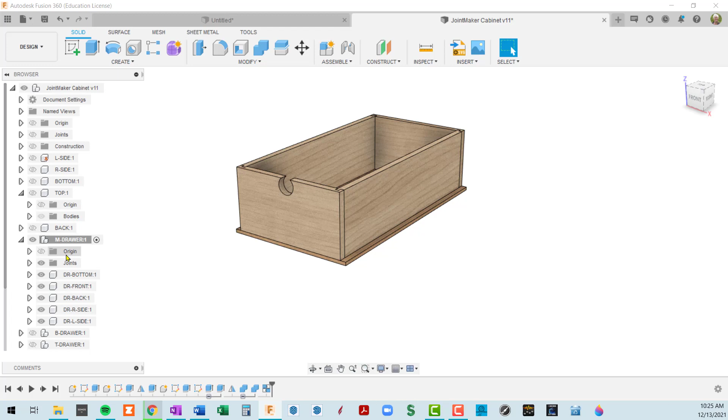If I want to see another drawer here, let's see what else do I have? On this same level, I can turn on this bottom drawer, I can turn on the top drawer. And if I click here in the top level component, I'm seeing just the drawers now. So that's another reason for using components.

All right, next up we'll get into a little bit of manipulation of this timeline. I said earlier that the timeline will change based on what component is active with this fisheye. If you activate the top level component, you are getting the timeline for the entire model, and you can see I'm scrubbing this scroll bar left and right—it's quite long. If I go to any one of these individual components and activate that, you can see the timeline gets much shorter and much more manageable. So basically, this is the timeline of all of the sketches and features involved in making just this component.

So when you're doing timeline manipulation, you can see if I go to any one of these components, I have something that's manageable here versus the top level, which in a complicated model is an absolute nightmare to deal with.

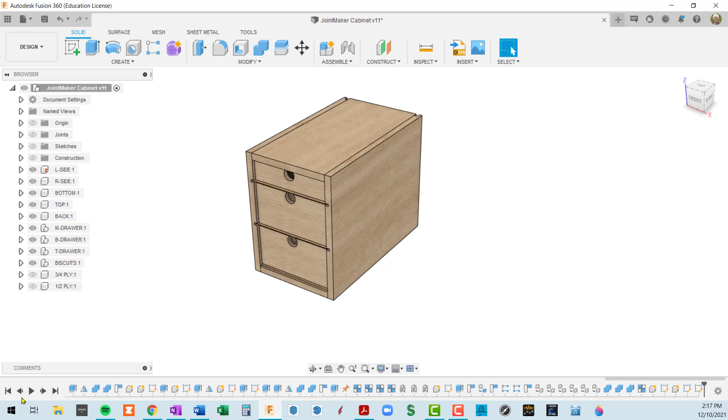If I hit this button, now you can see all of this stuff on the timeline is grayed out, and look, nothing's here inside the model.

If I step forward one step at a time, you can see here's something — this is actually a component getting created. So each one of these little icons in the timeline means something. If I hover over it, I get a name. It says L side 1, which is the name of the component I made, and it shows what its parent is right below that, which is the entire upper level model.

If I go one step at a time, I can see here's a sketch that was created. If I open up this component within the timeline and show my sketches, there is the sketch. It's a little funky as you go through this timeline — you may not see things happening, and if that's the case, it's generally a sketch or some other body or construction plane that's been hidden.

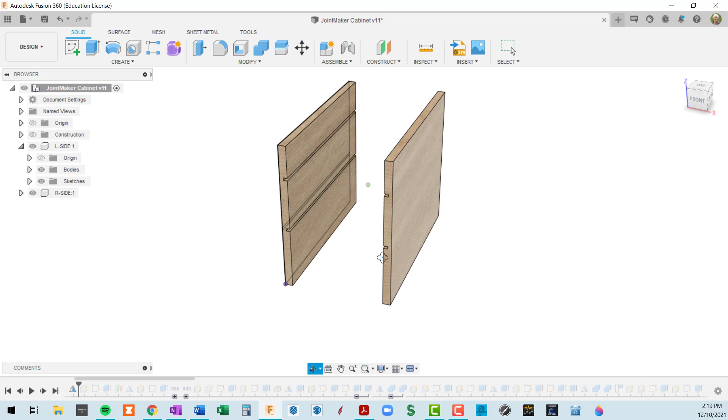The third item here is an extrude. So I'm just stepping through, and you can see things happening on the screen — there's a dado being cut, or you'll always see effects here in the timeline. This was a mirroring command that I'll get into, but you can see this component was made, and then an exact mirrored copy of it was made on the other side of the screen. So that's what these buttons do — they let you step forward and backward.

Let's go back to the beginning, and I'll hit the play button, and now we can watch an animation essentially of this entire model getting made, which I think is pretty cool. The only time you're not seeing things happen is if, in the browser, whatever was being made is set to invisible, then it won't show up here. And this green bar down here is moving to indicate where this playback is within the entire timeline.

Okay, so that is the timeline. I'm going to stop playing here by clicking the square button. Let's go to the end, and let's go to one particular part — let's go to the left side. I've activated the left side, which means the timeline is just showing what happens in the left side. So let me show you briefly the power of this.

Let's say I wanted to extrude these sides to a different thickness. Right now I've got probably 3/4 of an inch. If I go back here, I can scrub this back, let go of it, and you'll potentially see changes on the screen. So far, our component is still visible.

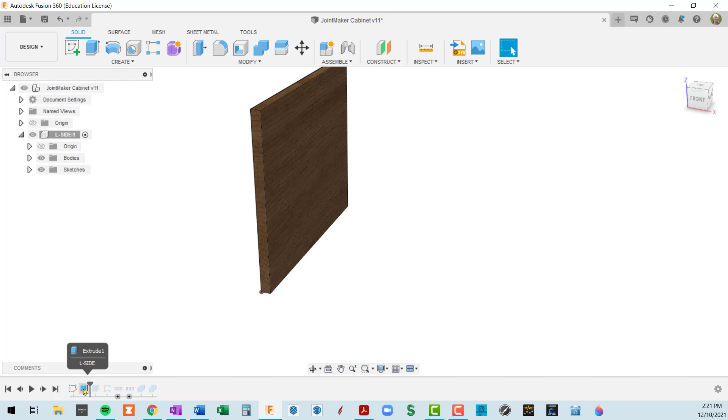Now, if I go back before this extrude, it's just a sketch. So if I go past a feature, I'm able to right click on it and actually edit the feature. Here I can see that it's an extrude — it shows the profiles that were selected. So basically I selected 3 different parts of this sketch and pulled it in this direction. And actually I'm using a parameter here, which we'll get to, but I set up a parameter for the plywood thickness.

But let me change that distance to 1 inch. Okay, now this piece got thicker. Now as I scrub this timeline, you can see the dados are still being cut here, and everything appears the same as it was, except this side is now thicker. So I didn't have to undo the model to go back and make a change way back towards the beginning of what I was creating. I can manipulate the timeline, edit the feature, and essentially that is what parametric modeling is all about.

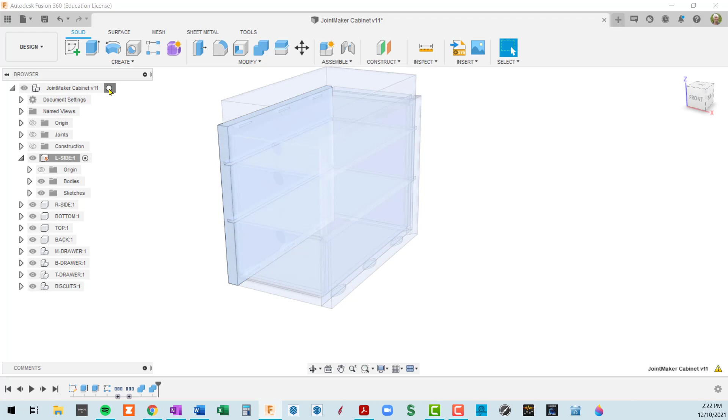Okay, there will be problems sometimes when you go back and make changes. You will see either a yellow highlight, or let's see if we have one here. If we go to the full timeline, let's see if I created any problems by changing that extrusion.

We're getting deep in the woods of timeline, but I wanted to give you a little exposure. Here's a warning that was created when I made those changes. You can see this bottom shelf is all screwed up now because I was doing an extrusion based on the fact that this was 3/4 of an inch. I'd have to go back and examine exactly what happened, so I'm going to undo that so my side goes back to 3/4 of an inch.

I just wanted to show you, in a complex model, once you get more familiar with these things, you'll be able to not just undo a bunch of steps to change something, but go back and change it anywhere within the timeline. Another thing is you'll be able to delete things—you can say I want to delete this feature altogether.

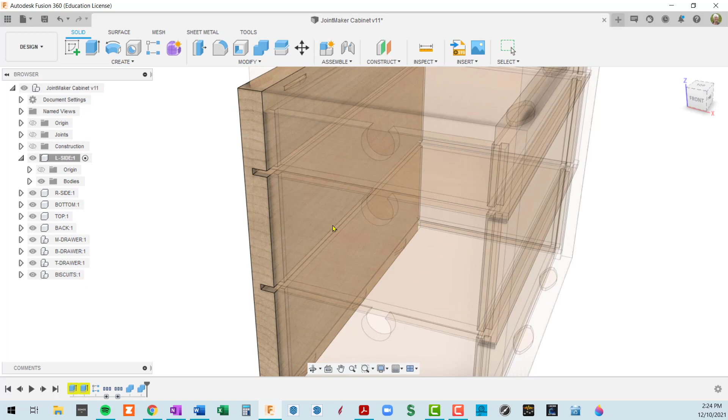Sometimes when you do that, all hell breaks loose. If I was to delete the sketch, let me go ahead and do it here, it gives me a warning: are you sure you want to do this, because you're about to screw things up. The extrusion is now warning that it doesn't know where that sketch is—you deleted it. It has a cache of old sketches, so it was able to render this, but anytime you get a yellow highlight, or worse, a red highlight which is an overall error, you have to go in and fix it.

We'll get into more detail on manipulating the timeline, but I wanted to give you an overview of why it's there, how to play back, and how to go back in time and make changes if you need to.

One of the things that's very important in a design program is verifying your measurements. I think SketchUp is actually a lot easier than Fusion for verifying measurements, but there is obviously a way to do it in Fusion.

I'm just undoing a few things I screwed up here. There we go. All right, let's look at this model and measure some things. If I want to measure this piece, there's a couple of ways to do it. The easiest way is if I just click on an edge—in the lower right corner I see one edge, length 14 inches. If I click on this edge, I see 18 inches, which is very handy. If I click on this edge, I see 0.75, 3/4 of an inch.

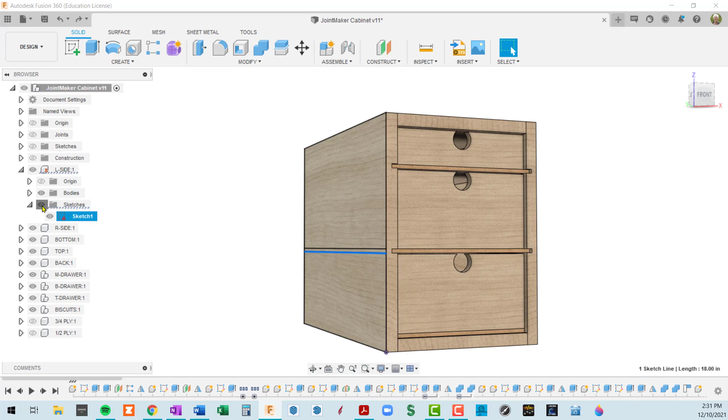If it's a little more complicated than an edge, say I want to know what's the opening in this cabinet—the reason we're seeing something a little screwy here is this is a sketch. I'm going to right click on it, find it in my browser, hide it, and tidy up my browser by collapsing that folder. Now we don't see any sketches, we're seeing the 3D model.

So let's say I want to verify what's this opening in my cabinet. I'm going to go to the Inspect menu. I can either click on this, which is Measure, or use the shortcut key I. So I can click there, or click here, or simply press I.

That's what the I shortcut is in the menu. Okay, I'm in Measure right now, and I can click on an edge, for instance, and get a little 1 symbol. If I move to another edge, I get a 2 symbol, and I get 9 inches up here. Now, without doing anything, if I click on another edge, the 2 moves over. So the initial click stays, and I can change the second click. Now it's 9 3/4 from the inside of this left-hand piece to the outside of the right side.

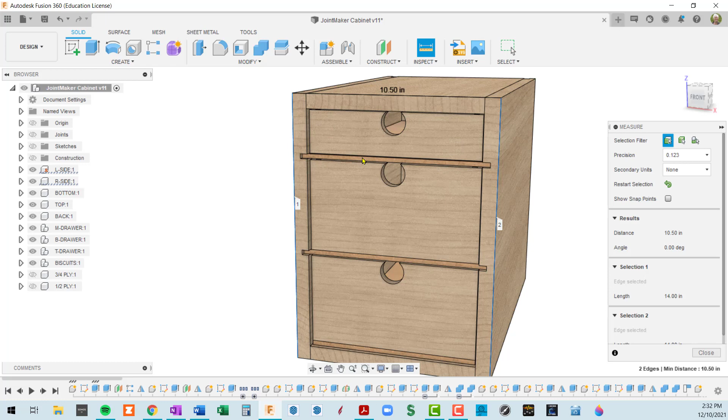If I want to measure from here to here, I can either close this and get back in, or click on restart. I'm going to restart, click on this edge, and now up here I'm seeing 10.5 inches from outside to outside on the cabinet. That's a quick introduction on how to measure.

Let's look at selection now. I'm going to close down this feature dialog box—remember these things have to be closed. If you start doing something and nothing happens, the first thing to check is whether you have one of these feature dialog boxes open. So I'm going to close that, and we're going to look at selection. I can just click on something, and I've selected a face down here.

Another way of doing selection is to actually drag through. Let's say I wanted to select all of these components. I drag through going from left to right, so basically anything that I totally intersect is now selected. If I go from right to left, and if you're a SketchUp user you probably know this, it's the same in SketchUp. This is just anything that I touch. So if I just touch this right side component, I have selected the component.

If I had done the same thing here, going from left to right, it doesn't select anything because I haven't surrounded anything in its entirety. I have to surround this entire piece going from left to right to get a selection. But if I go from right to left, it's anything I intersect. So sometimes right to left selection is a lot easier to deal with.

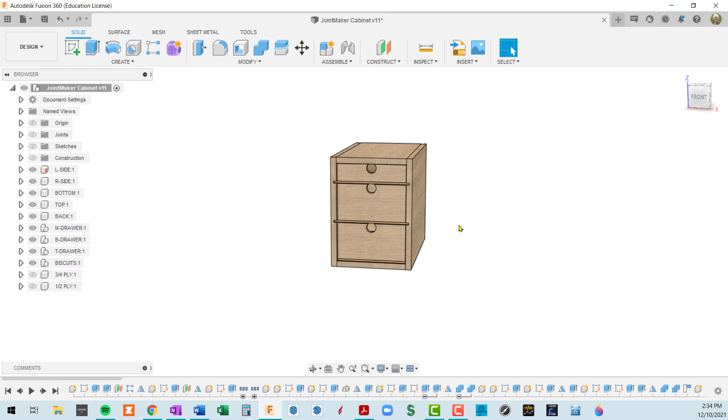Now the last thing we haven't looked at - I've got some default appearances set up in my system, so everything I draw turns into wood automatically. But you probably don't have that yet if you first start out in Fusion. So if I go to a new folder, I'm going to hit A for appearance, and let's see if I can go to a more basic appearance here. I'm not really sure what the default appearance is. Let's see if I type in default, if I get something.

Well, let me just drag this out. Now, I know I didn't explain that, so I'm just going to make a body. I'm going to quickly make a sketch on this plane, press R for my rectangle tool and do a couple clicks, then press E for extrude and come up and click. So now I get this red body. I just wanted to very quickly create something that wasn't wood and show you how to change something's appearance.

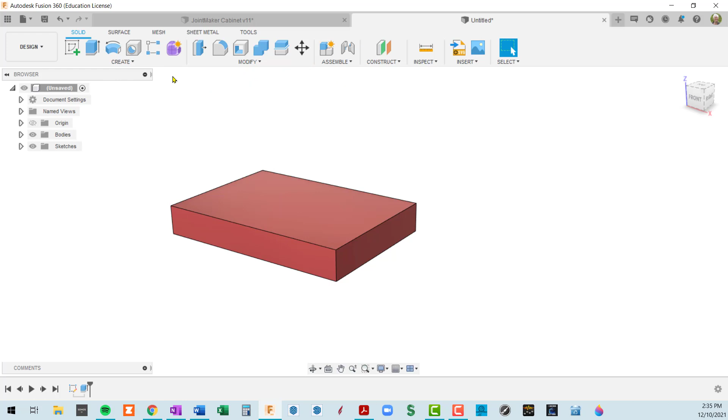Okay, so appearance - actually not sure where it is in the menus, but I do know that there's a shortcut key. I'm sure it is in these menus somewhere. Let's see, modify maybe? Yes, appearance is in the modify menu, which makes sense. So you can either press A or go to this modify item within the appearance item in the modify menu. And now you're going to get this feature dialog box that pops up.

You can either search for things in here. For instance, if I search for MDF, scrolling down here, I get MDF board. So I can drag this and release it on top of a body. I'll do a Control Z to undo this. Or I can go over to my browser - this is the body that we have on the screen, so I'm just hiding and showing it to verify that.

Now if I hit A for appearance, I can drag this MDF board onto the body. Oops, I guess I should undo that. Let me go back. I'm going to drag this red onto that body. So now if I wanted to make this MDF, you'll see in my appearance dialog box, I have what's in this design, the various surfaces. So I guess this is probably what you would see, this matte surface. Let's see if I drag that to the body. For some reason that's not changing. But anyway...

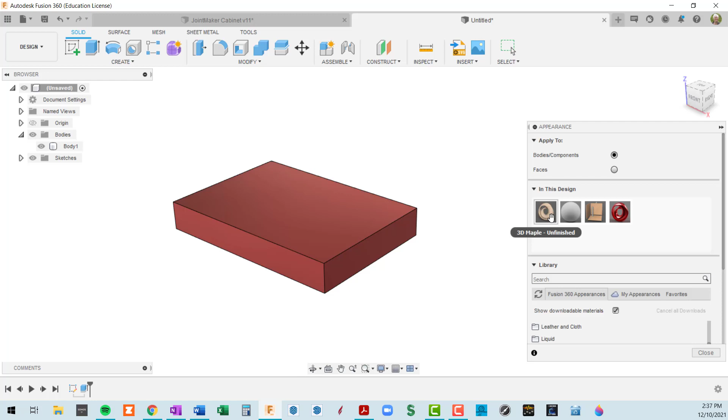So how do you get various woods? If we scroll down here, you'll see that each one of these is a folder. Keep in mind, this is a little weird, you've got two scroll bars - one for the entire dialog box, and then within this Fusion 360 Appearances, you have another scroll bar. I have often lost my 3D wood effects - it's like, I know there's another wood folder, where the hell is it? Well, this scroll bar will let you, in combination of the two, get down to wood solid.

So what's the difference between wood and wood solid? If I open up wood and I drag this onto this body, you will see a wood surface on here, but I'm not seeing any end grain. I'm basically seeing the same surface on all sides of the body, which is what SketchUp does. Fusion has 3D appearances, which I use all the time. So if I go down to wood solid, open that folder, and again I've got to get my scroll bar to go down here, I've got unfinished, finished, painted, stained.

So I'll go to unfinished, scroll down, and these are all 3D woods. Now, if you see something that's got a little down arrow next to it, let's say we want ash, I'm going to click on that, and now it is downloaded to your system. And now I can drag that onto my body, and I should get an ash effect.

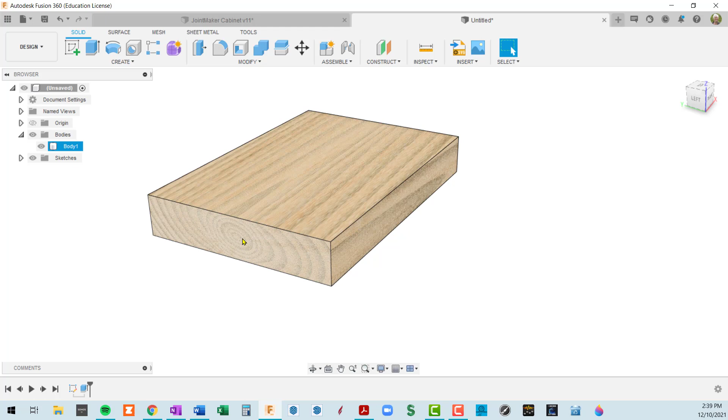It's fabulous. Now let me close this and show you that if you're really particular about the look of your wood, let's say you've got quarter sawn wood, I can right click here and go to my texture map controls, and use these arrow keys to actually move this end grain so that I've got quarter sawn, and I can rotate this too. So you have a tremendous amount of flexibility as to what your piece of wood looks like, which I think is just fabulous.

Okay, so that is appearances. There's one other thing that's sort of related to appearances. I'm going to go back and open up a complicated design to show you that. I'll go to that workbench that I showed before. If I open that up, by the way, all of the models that I reference in the videos, I will put in your folder so that you can have access to them.

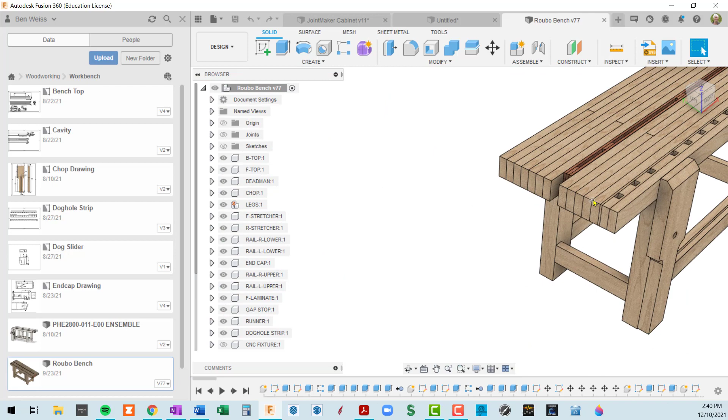Okay, so in this Roubo workbench, I've set cherry for this tool holder, and the rest of it I think was birch, which is actually what I built it out of. And this end block was also cherry.

I wanted to show you that you can also show components by color, which is useful in a couple of different ways. So if I go to Inspect and Component Color Cycling Toggle, now I see a bunch of colors, and those colors correspond to different components. So it makes it really easy to find components in the browser, and in the timeline, because now when I get into this mode, everything is color coordinated between the browser, the timeline, and the model.

But obviously it's not very realistic looking. So I can, without changing the appearance, override that and go to this color cycling mode. So I'm going to go back to Inspect and turn my actual colors back on.

One thing I forgot to say about appearances is there's a way to set your default appearance so that anytime you're creating something, like in our case, you probably want it to look like wood. So I'm going to go up to my preferences. I'm going to click on, I've got a picture here, but yours might be your initials, upper right corner. I'm going to select preferences. And when that pops up, I'm going to go to, where is it?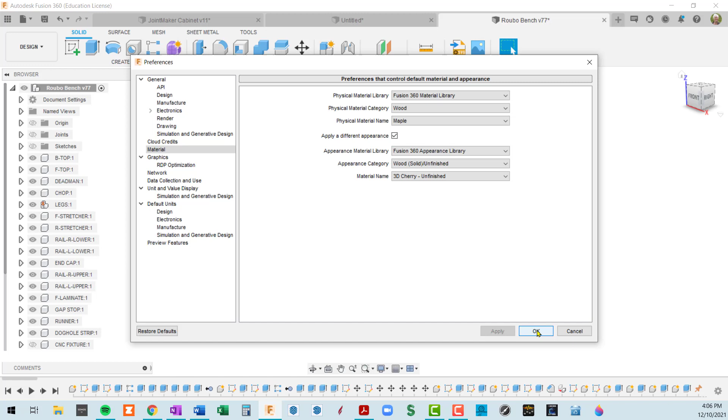And these are going to be choices from the appearances that you have previously downloaded. So let me change mine to cherry. I apply, go to OK. And then if I create a new document, I'm going to create a sketch on this plane. I'm going to hit R for rectangle, make a quick and dirty sketch, hit E for extrude, pull this up, and now my new body is automatically cherry, and it is coming in 3D.

So if I right click and go to my texture map controls, you can see that I can center the pith, for instance, or even scale the material.

Okay, that's all. Next, I want to get into moving and aligning and also copying. So I've got the basement office shelves open here. I'll just orbit around in the model so you can see what it's all about.

In the browser, I have a number of components. If I hide a component, you can see this is a large shelf, this is another large shelf, a vertical divider, a small horizontal shelf, and a small divider. So I have 6 different components.

Let's say I want to move one of those shelves around. I can go to Modify, Move, Copy, but most often I would just hit the M key. So if I hit M, I'm presented with a dialog box with different selections: components, bodies, faces, and sketch objects.

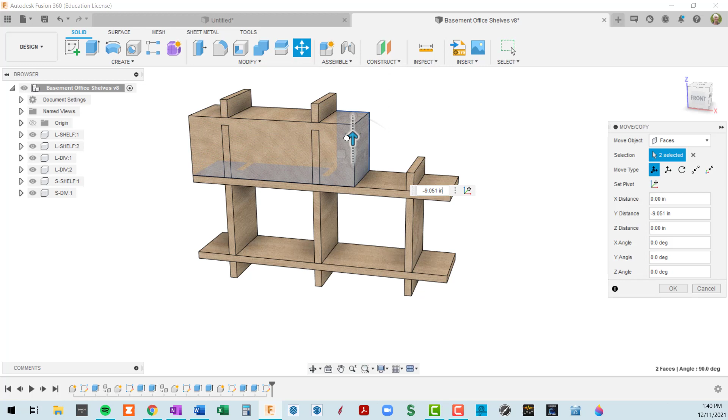Let me pick faces first, because generally you don't want to do this. If you've got a component that's not open for editing and you try to move a face, you can see you're basically changing the 3D object. I can use this rotation thing, and I'm horribly changing that shelf material. Generally not what you want to do. There are other ways to do fancier bodies like this, and you wouldn't move a face. So that's an object type you probably don't want to move.

So I'm going to Control Z out of that. Now let's talk about moving components.

Any of these are components, and if I click on one, hovering over it, I get this triad, which allows me to move or rotate the object. So I'll click there, and by doing so I set essentially a pivot point. Now when I'm moving from that point, I'm just dragging in a direction, and I can move in either direction. You can see your distance is updated by your last move, and this window shows your distance as well.

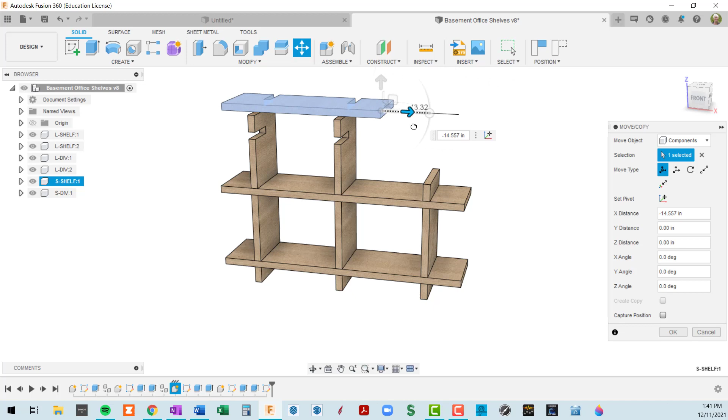If I just do an OK, you'll see there are a couple of new tools on the screen. One says capture position, and the other says revert. If I click on revert, the component goes back to its original position.

So let me do that again. I click M for move, click here, move this component horizontally, do an OK, and now if I click on revert, it's actually going to stay there. Okay, I'm actually going to undo that.

I also want to show you that components can be moved simply by just dragging them. We'll get into grounding at some point, which prevents you from doing this, but if it's a component, you can simply move it around on the screen.

Now, a component, as we learned earlier, can exist with several bodies. For instance, let's revert back to a shelf that looks like a shelf. Let's say we wanted to put something on this shelf and make it part of that component, a book or something to be on that shelf. I would first go to the shelf and activate it. So I'm actually activating this shelf, and now when I create a sketch, I'm creating a sketch inside that component.

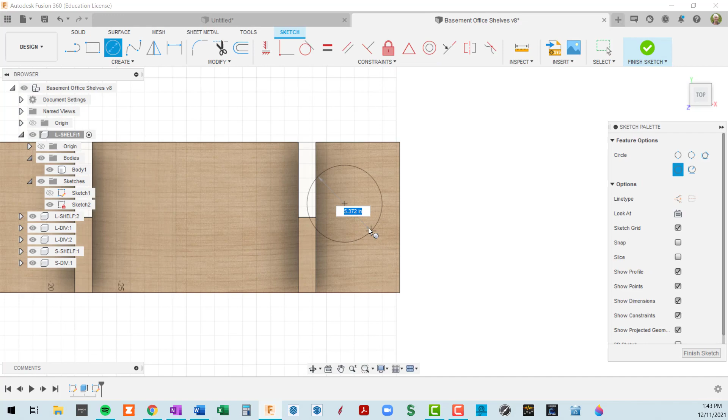So if I open up the shelf folder, when I start drawing on this surface, I go C for circle, and then extrude this up by pressing E. What I'm trying to do here is show you that I'm creating a second body inside the component.

I actually need to do a new body here inside the component. So now getting back to move, when we do an M for move, instead of selecting components, I can say I want to move the body. Now when I click on this, I'm sliding the body inside of this component, so nothing else is moving except for the cylinder that I put on the shelf. If I want to move it over here, I can do that.

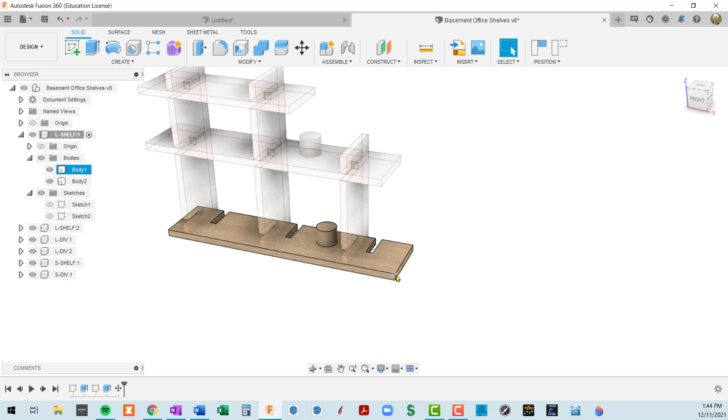Now, if I simply click on this body, this cylinder, you can see it doesn't move, but the component itself moves. So you can't move bodies by simply dragging them in 3D space, but you can move components by doing that. So that's yet another reason why, if you're going to create something, I always make it into a component. I'm just undoing a little bit here.

So that you can easily move it and you don't have to get into this move command. But the move command, if you do get into the dialog box

With nothing selected, let's say we decide we want to move a component, there are several movement types. The first one is free move, which it defaults to. So if I click on something, I've got this triad, I can move it in any direction. I can also use these surfaces to move freeform within here, outside of the X, Y, and Z plane. I can rotate in this axis, I can rotate in this axis. So free move will allow you to do all of that stuff. I'm going to get out and say okay, so that's going to be in a new position.

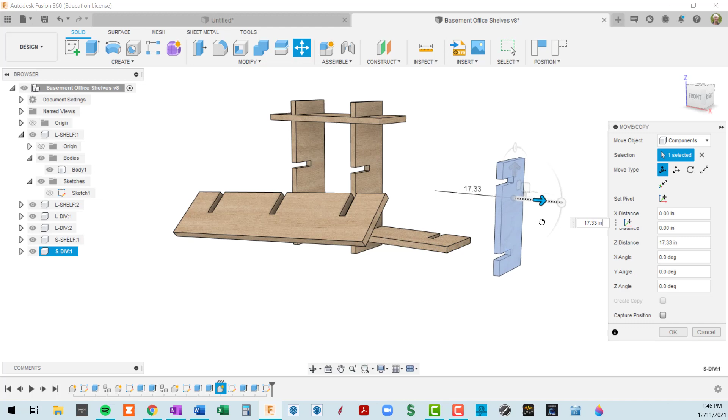Now let's say I didn't do this revert, and let's say I want to reposition this shelf. I hit M. Component is good, I want to select my component now, so I'm going to select that. And I start moving this guy, and I hit OK. It's going to continue to allow me to move these components.

But if I try to do something else, like an extrude, for instance, I'm going to get this dialog box, which you will run into, that says some components have been moved, capture the current position, or continue in the previous position. So if I click capture, it's just like doing this button, where it's going to capture the position. If I do continue, it's going to revert back to the original position. So that's the dreaded capture position dialog box. It simply means you've moved something and you haven't finalized its position.

It can be reverted. A lot of times, like in woodworking, you want to see, well, what's the joinery here? Well, oops, let me undo. Okay, so what's the joinery here? Well, one way of looking at that is I just take that component, move it out of the way. Oh, I see that it's a slot. Okay, now I can revert and put it right back. So that's the reason why you would want to move something and not actually keep its new position.

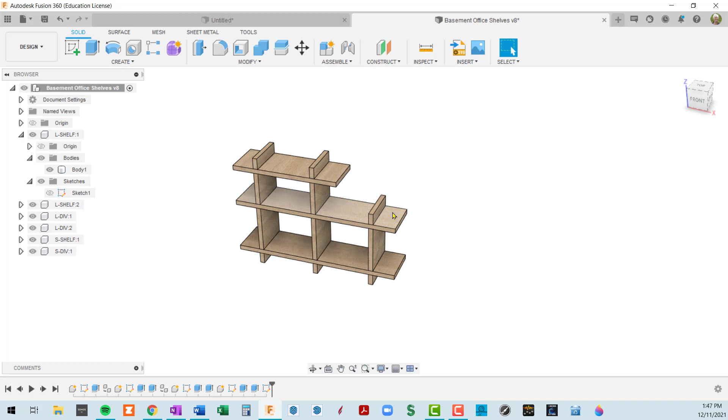Okay, if I want to move something accurately, let's say I wanted to move this shelf down to the top of this shelf, how would you go about doing that? So I'm going to press M for move. I'm in component mode, so I'm going to select my component. And I've got a choice of where to grab this from, and that really does matter in this case. I'm going to grab it basically anywhere on this bottom surface. So now when I start to move this down arrow, I can just click on this surface and it will go all the way down there flush.

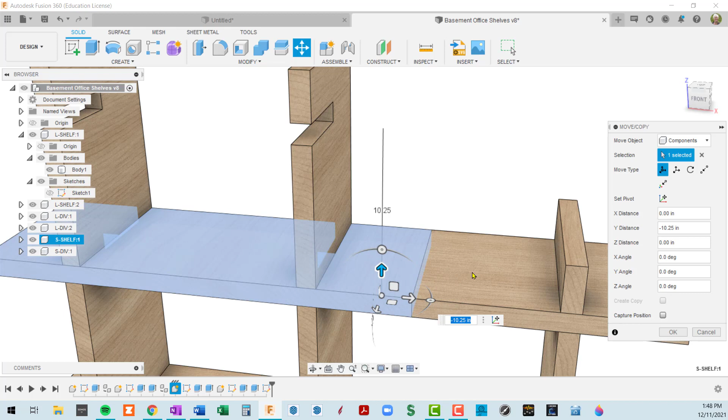But if I hit M for move, select my component, if I had grabbed the top, my pivot point is on the top of this. If I start coming down here and I select this surface, the two tops are aligned. So it really does matter where you put that pivot point if you're going to do this type of movement where you simply click on a surface to essentially align the component with another component.

So let's say we wanted to rotate one of these guys. It depends on where this pivot point is. So if I hit M for move again, and I select this component, let's say I'm not paying attention, I just click there, and I kind of arbitrarily set my pivot point. That's exactly where it's going to pivot from.

So I'm going to do a Control Z to go back, another M to get a move. This time, I'm going to say, okay, I want to set my pivot point. And I come in here and say, I want to rotate this right from this point right here. Okay, great, now I start rotating and look what happens. Well, in that case, that worked.

I'm a little surprised because what I was going to say is there's a set pivot checkbox that normally you have to check before you can use the pivot itself. And it's kind of frustrating that it doesn't do most of the time what it just did. It automatically finalized the pivot point and lets you use it.

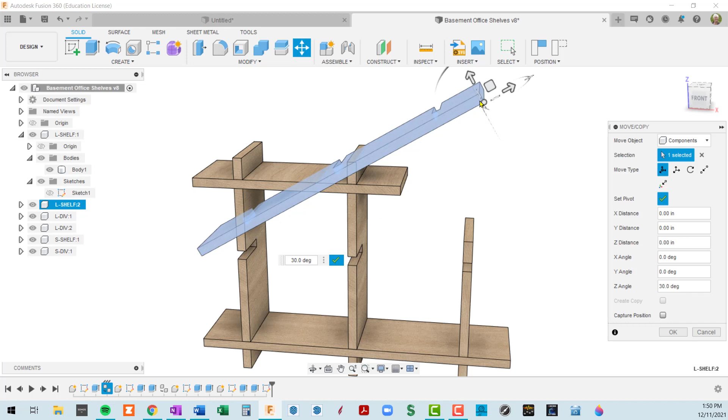But just be aware, generally when you're using pivot, like if I want to change the pivot right now and say to over here, I'm going to click on this to set the pivot. I'm going to put it here. Now, there's a little green check mark that I have not clicked on.

When I do this, I'm actually rotating the pivot point instead of the board. So just beware that if that happens, you may have screwed up your pivot point, but if it's still in a good position, you can just click there to check. And now you're rotating your board using that pivot point. So that's the pivot point.

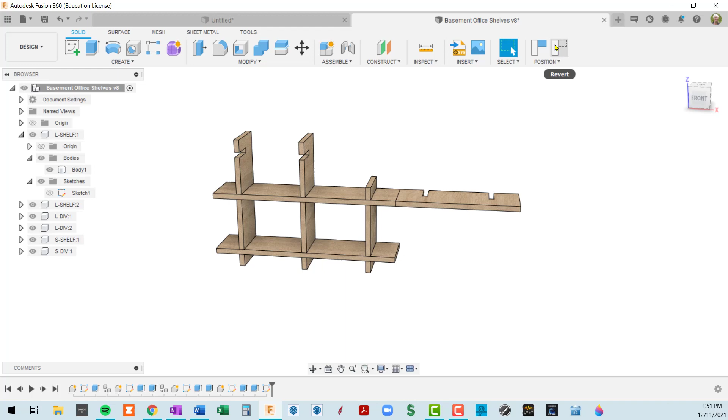Another handy way of moving things is point to point. If I hit M for move, I'm in my component mode. I'm going to select this component, and now I'm going to go to point to point. It's saying pick an origin point, so I'm going to pick this point here, and then the blue highlight is on target point, and I'm going to pick this point. Now the two shelves are aligned because I did a point-to-point move. Then if I do OK, I have my capture position or revert. I'm going to revert in this case. So that's how to do that.

The difference between free move, I did another M, and translate is pretty subtle. If I do a translate, I can pick and only move this X, Y, or Z. So it's kind of a safer way of moving things. The free move allows you to do rotations on two different planes, it allows you to move freely in 3D space, and it allows you to translate. So it's got everything built into it.

Okay, so that's the basics of move copy. And if you knew ahead of time, it's like, I really want to be here, I want to capture this position, you can click on that capture position check mark, and now you're not pestered with these icons to capture or revert. I'm going to Control Z my way back out of there. Hopefully, do not know why that's not Control Zing. All right, there we go. It's just taking a while. Okay, there we go. All right, so that's the basics of move.

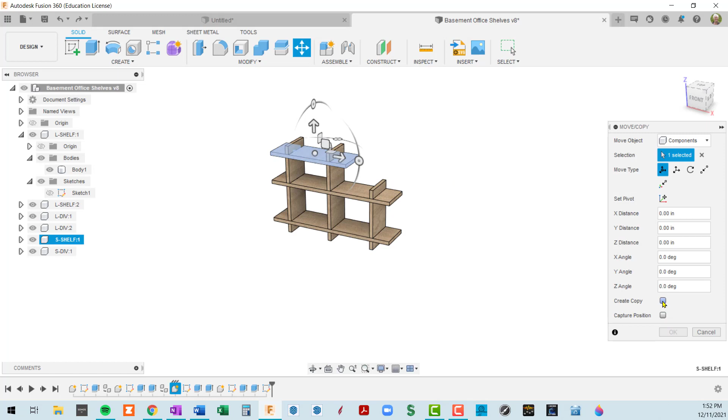Copy is also in the move command. So you see if I hit M and I select a component, there is a create copy check mark, which I can check. Now when I drag this shelf, I'm creating a copy of it. Then if I click OK, there's another component. What happened is over in this tree, if we click here, we can see here is, with the blue underline, the new component, and it's an exact copy of the first component. That's why there's a 2 after here. So it's a small shelf :2. This was small shelf :1, which I created a copy of.

I generally don't do copies that way, I find that a little bit confusing. So let's undo that. If I'm going to copy something, I would select the component I want, which I can do in the browser, or I can click in the model, do a right click, do a copy, or do a Control C, same thing. Now, when I do a paste, Control V or right click paste, I want to be in the component that I want to put it in. So if the top level component is activated, it's got the fisheye, that new component, when I do a Control V, is going to be in this same hierarchy in the tree. So if I move this and click OK, I've got another shelf here.

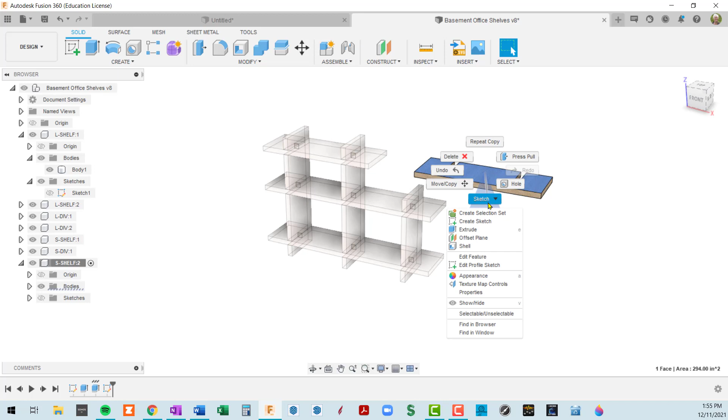That's what I just created, what I'm hiding down here in the browser. So I'll undo that. Let's say I wanted to put another shelf inside this component itself. So now if I click on this, I'm going to do a copy. I'm going to activate this new component over here. Let me show it also and open it up so you can see what happens here. If I right click and do a paste - where's paste? I guess I didn't do a copy. Let me do the copy first. Right click, and let me do it this way.

I'm going to right click on this component itself and do a copy. Now, this is an activated component, so when I do a paste, it's going to go inside that active component. So when I do my paste, where is my paste? I guess what I have to do is activate the top level component. Then, without activating this, do a copy. Now I'm going to come down and activate this component. I want to put it inside here, so I can right click and do a paste. Let me see if I can do a Control V. What's happening? Not sure. Going to stop the recording.